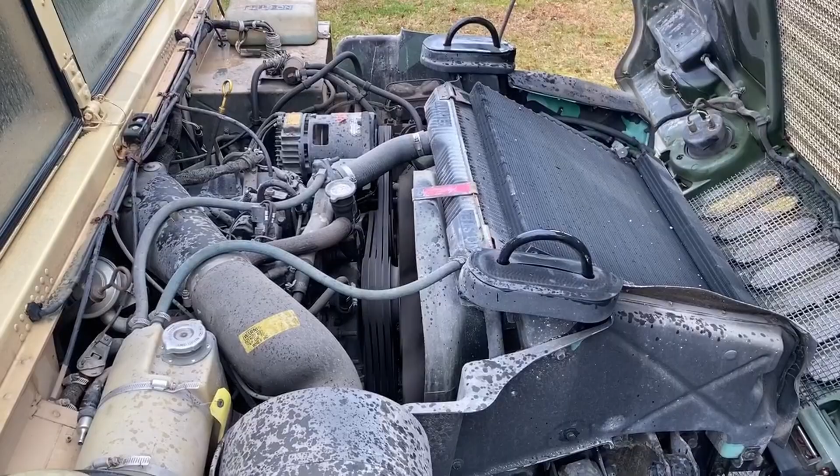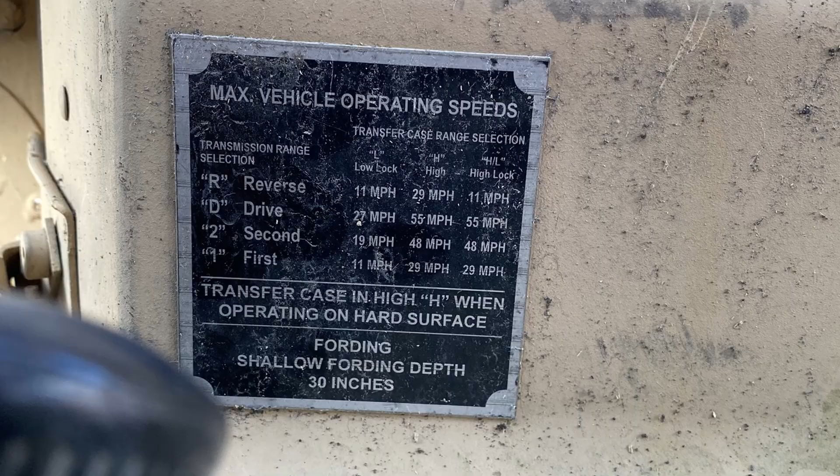When I first got it, it didn't look like it was in great shape. The top was ripped to shreds and water was pouring into it. It had bald tires and the batteries were on life support. But the engine was very strong, the frame and body were in very good condition. Overall, it was a good vehicle.

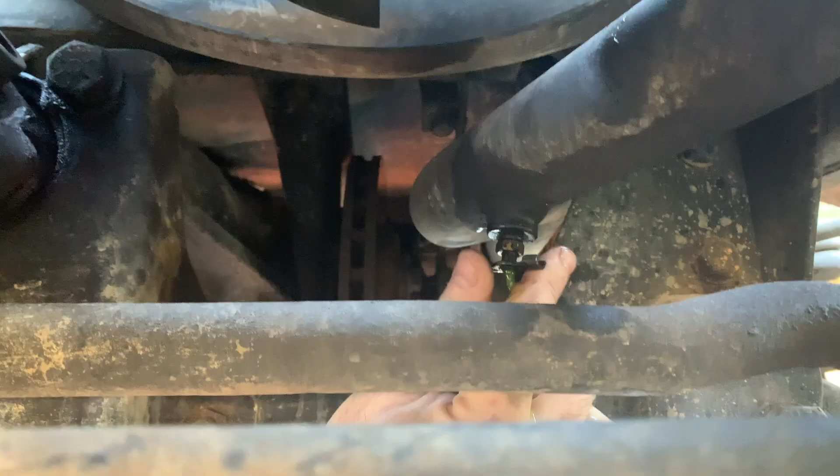I did replace the tires and the batteries. I put in a new top and rear curtain and new doors, along with some other minor changes to make it drivable. Also replaced all of the fluids, and they all looked very clean. It looked like it had been well maintained. So it was a very good vehicle, especially for its age. I drove it for about 2 years, which was a ton of fun, but was always planning to tear it down and rebuild it eventually.

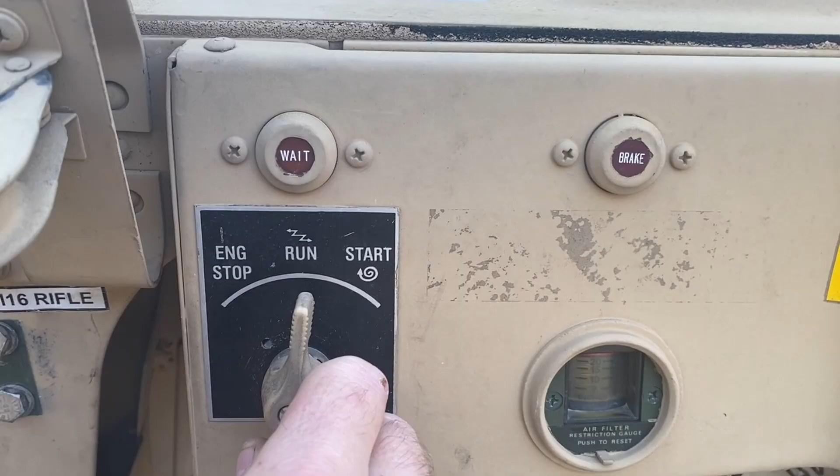But towards the end there, I started to have an issue, I believe, with the smart box, where starting it became a little glitchy. I tried doing some simple things like replacing the ground harness to see if that would solve the problem, but it seemed like ultimately it was going to need a new smart box, and I didn't want to invest in that. It's relatively pricey. Knowing that it would not be needed for the rebuild, it just didn't make sense. So I decided to just go ahead now with the rebuild.

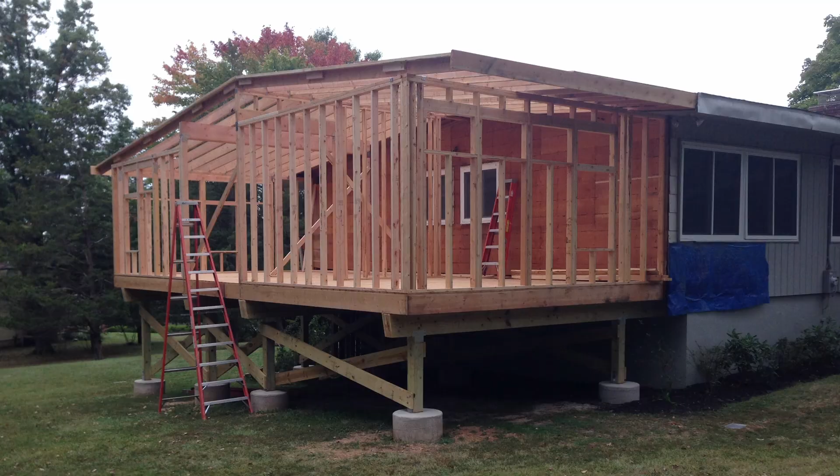I'll tell you a little bit about myself. I have never done anything like this before. I'm an architect by trade, and outside of my normal job as an architect, I have done a whole lot of building. I've completely demoed and rebuilt 2 houses with my family living in them at the time, which was very challenging to say the least, but ultimately very successful builds.

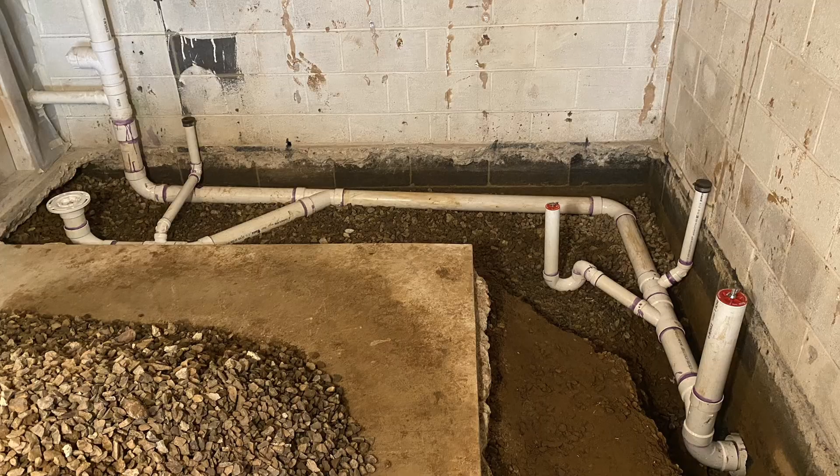I've done a number of other construction projects, as well as some furniture and things of that nature. I've done everything from foundations to framing, roofing, siding, windows, electrical, plumbing. I put the new electrical sub-panel in the garage where I'll be handling the rebuild. Pretty much you name it, I'm comfortable in that world.

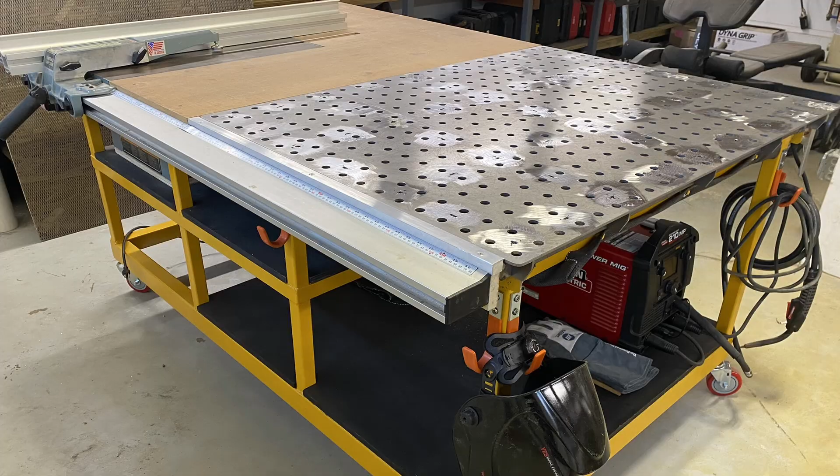But I've never done anything in the automotive realm. I have a decent amount of book knowledge about vehicles, but I've never really done much in that world. So this will be a whole new experience for me. And of course, the whole EV part of this is a whole different universe.

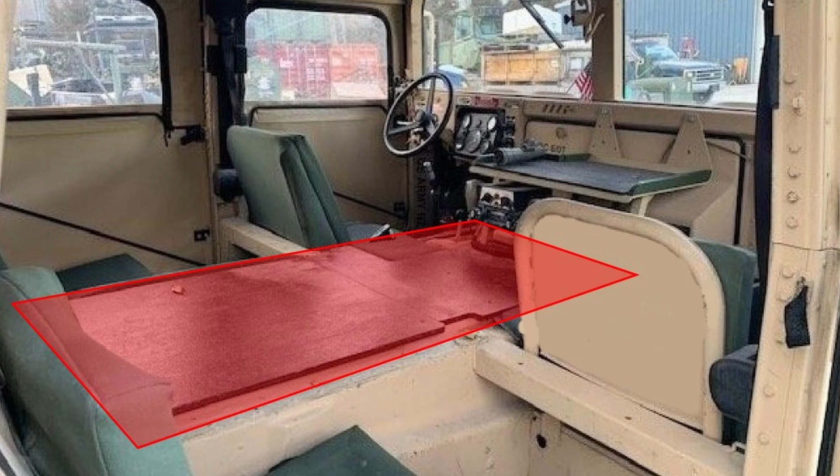So just to give you an idea of where we're going with this thing, converting it to electric, the basic idea is that we're going to use this big, juicy volume of space at the tunnel, which is fairly wide and has a fairly large volume of space, to place the battery modules. Obviously, that big, generous volume of space is only available to us after we remove some things that are there today. The fuel tank is an obvious one that goes away.

We don't need a fuel tank anymore. Also running through here is the transmission coming off the engine. That's no longer needed. Also the exhaust, also going away. And then we have the transfer case and the drive shafts going to both the rear and front.

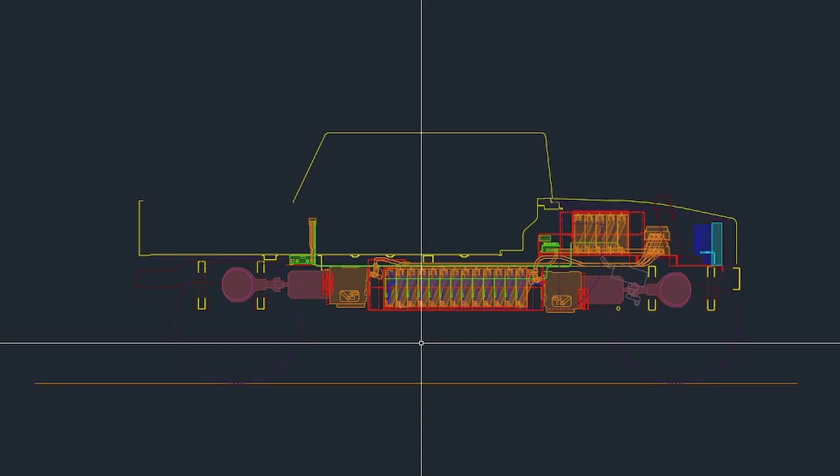So once we eliminate those, the premise is that we're going to be putting a separate motor at the rear and at the front. And essentially that acts as our transfer case, right? So that you could just run in rear-wheel drive under normal road conditions. You don't need as much torque, and you don't need torque at all 4 wheels. The single motor should provide enough torque, and we only need it at 1 axle. And so that frees up this big tunnel space.

And just looking at this in cross-section, I understand that some of these lines are probably too dark to show up. But like here are the tires. Those line weights don't show up very well. But you can see the tunnel. This is what we're concentrating on, is the tunnel here. And you can see that we have just enough room between these 2 frame rails, the 2 main chassis rails that run from front to back.

It would be nice if they were a little farther apart, would give us a little more tolerance, but I think it should work. We'll know more once we tear everything down and get a better look, but it looks like we have the width, and the height is also a little tight, but workable. So it looks like that's going to be kind of perfect in terms of really maxing out the volume there.

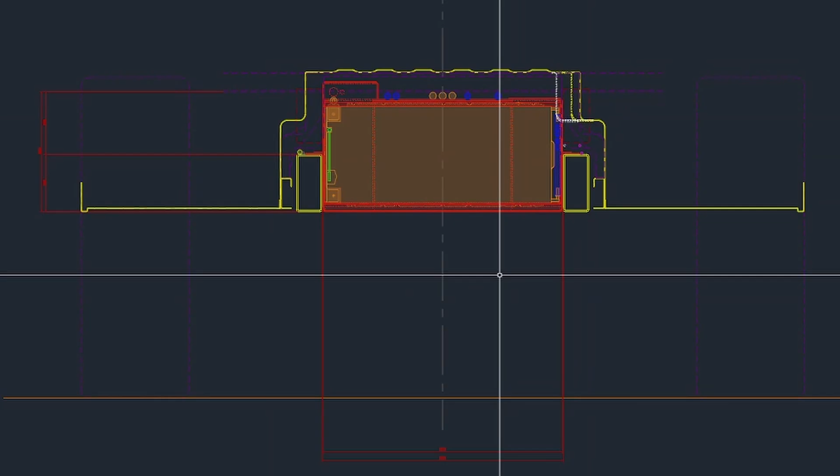We're thinking about using 18 Tesla Model S battery modules, which is what you're seeing there. And that fits pretty snugly. After we build a case, the case has to fit in there, and then the batteries have to fit in the case. But from a width standpoint, it looks like it should work.

And then lengthwise, after we factor in the other equipment, and just to take you through that, we're keeping the stock differential and everything downstream of that. So the half shafts and geared hubs, they'll stay, both back and front. And then moving upstream of that, we'll have a new gearbox that's needed to get the right torque to speed that we need based on our motor. I'll get into that later. Then the new motor, obviously, and then the same thing at the front.

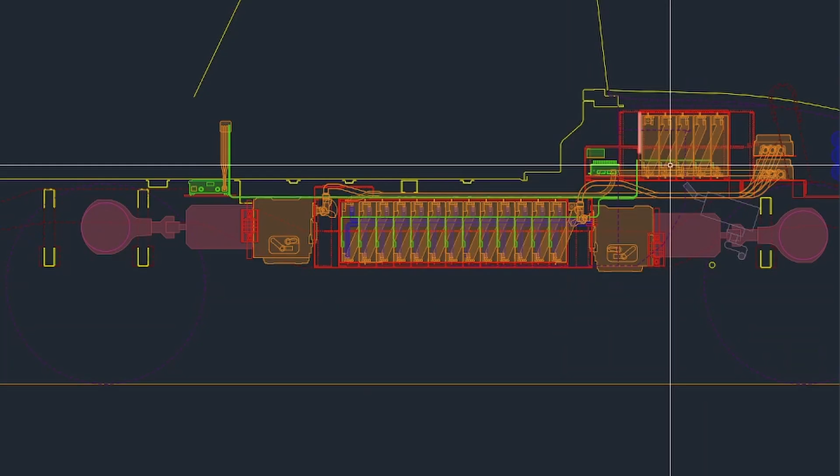And that gives us a certain amount of length through here left over, which looks like it will give us enough room for 13 of these modules, leaving us with 5 that we will place under the hood. So that's a very brief overview, just generally speaking, of how we're going to take this thing. And I'll get into this more as we go down the line.

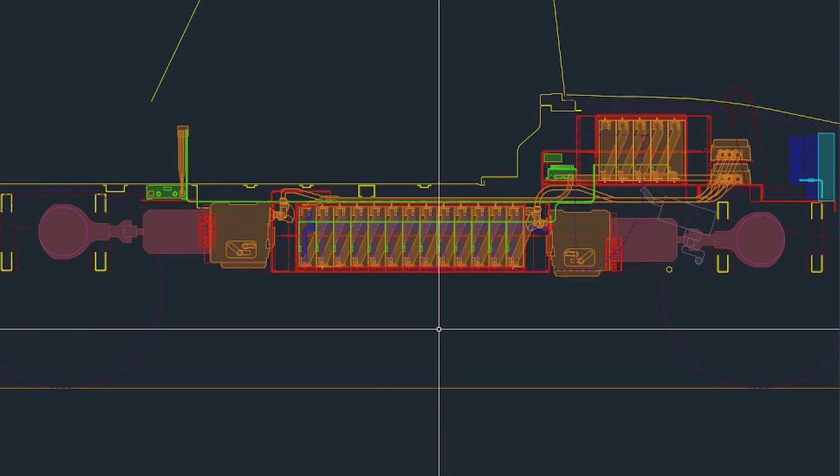I'll come back to this CAD drawing as we get into specifics and talk more in depth. But for the most part, the videos are going to be more focused on the build rather than the screen. But I'll certainly come to the screen at certain points just to sort of give a better picture of where we're taking the actual build so that it's a little more clear.

Okay, so that's it for now. One last drive around the neighborhood here to use up the fuel. The next episode will be focused on removing the body, and the following episode after that will be taking out the engine and getting it down to the bare rolling chassis. Probably at the end of that episode, I'll talk a little more about some more design-oriented stuff as well.